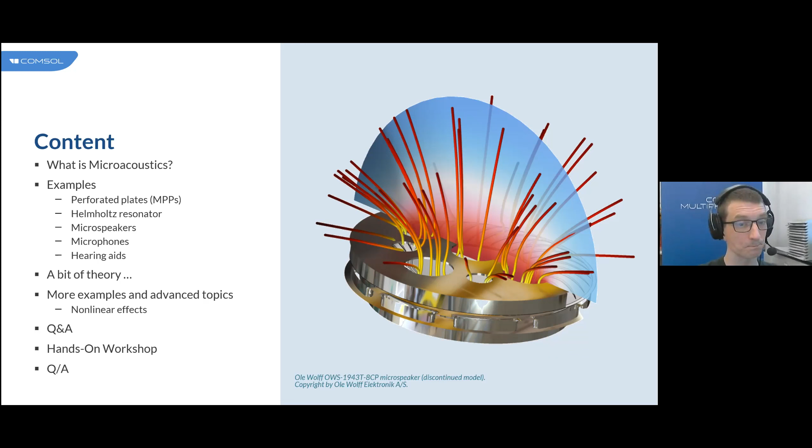So I will have a short introduction: what is microacoustics? Then I'll be focusing on a few examples. I will actually start with a Helmholtz resonator model with a lossy neck, so to speak. I'll talk a bit about perforated plates. Then we'll see some more advanced applications like microspeakers, microphones, hearing aids. In all these examples, we have small length scales in this millimeter and sub-millimeter range, and that's why we sometimes call it microacoustics.

Then we will have a bit of theory today. I think it's good to just get an idea of where the governing equations are coming from. And then I have more examples prepared, advanced topics, and I'll be mentioning nonlinear effects also.

So actually the image to the right here is a model of an Ole Wolff microspeaker. And the image has some nice colors here, but this is an actual tutorial model we have of an actual microspeaker. And now that I mentioned nonlinear effects, I just want to show you a cool animation of something that is also a thermoviscous phenomenon.

It's actually the generation of, in this case, thermal waves or thermal vortices, where a high intensity acoustic wave interacts with a small slit. So this is a much more advanced topic, nonlinear transient simulations, but the colors you see here are actually temperature fluctuations of the acoustic field. Just a nice animation with some nice colors also.

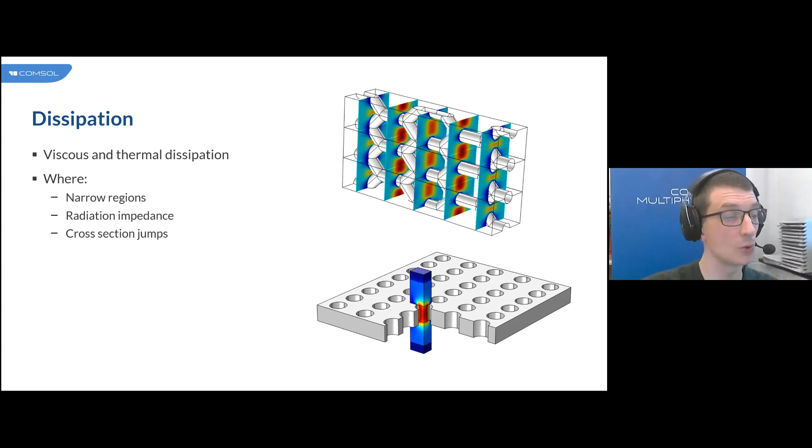I think, since there are so many COMSOL users present today, let me open the model that I set up in COMSOL. I will not go through the details of the setup - Tua will be doing that, not on this particular model, but after this presentation. So this is a very simple setup, a very simple geometry. It's a 2D axisymmetric model.

And I've parameterized my geometry here - the radius, the length of the neck, the radius of the volume here, the height of the volume. And then I've included the losses in this case - this is something I'll get back to. I've included the losses in the neck here using one of our many formulations, called the narrow region acoustics.

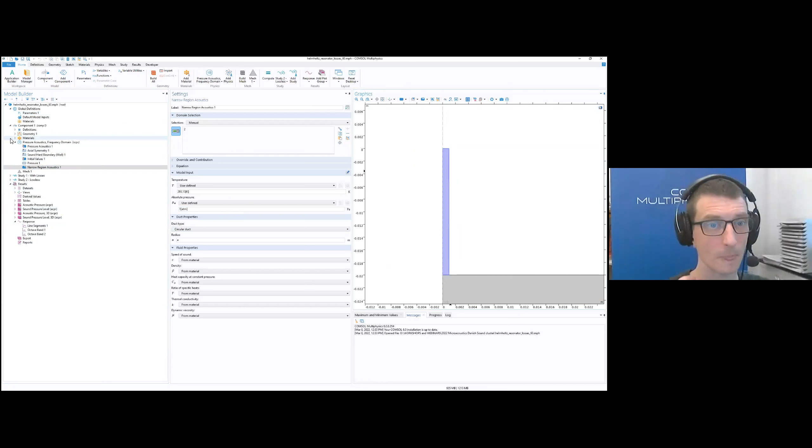And this is, so the losses are included in the neck only in this model. And then I've solved the model with and without the losses. You can change the neck size here, for example. You can, of course, post-process everything you like, and I've made a plot here of the response. So I'm just probing some pressure level somewhere in the resonance volume.

Any questions so far on this? No? No, not good. Not yet. Not yet. Please ask questions.

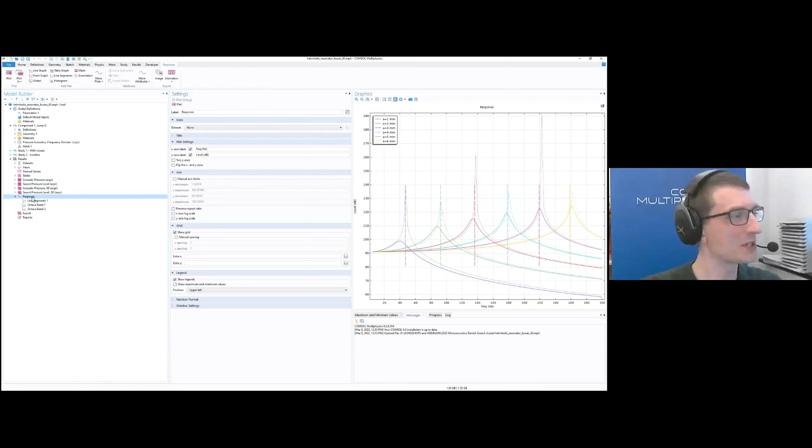So yeah, again, this was a very simple, small, classical textbook example, but I think it shows what you actually see in many systems. So one classical Helmholtz resonator system is the ear, where when you have an earbud or a hearing aid coupled to the ear, you actually have a Helmholtz resonator in the ear. And this is typically what you see - the resonance. If you change, for example, some tube diameters connecting to the ear, you typically see that you get a lower resonance frequency, and you lower the amplitude of the resonance. So it has some actual applications.

I also know that, for this, if you have a circular duct and a nice volume, you can add corrections to the analytical expression that will take the losses into account to some extent. But that's only true if you have a circular duct and a very simple geometry. As soon as you start building something real, you can do some approximations, but if you want to capture the losses correctly, then you need to use simulation.

Good. My next example here is perforated plates. So I want to mention this example here - we don't have it in the library, but if you want it, we'll be happy to send it along.

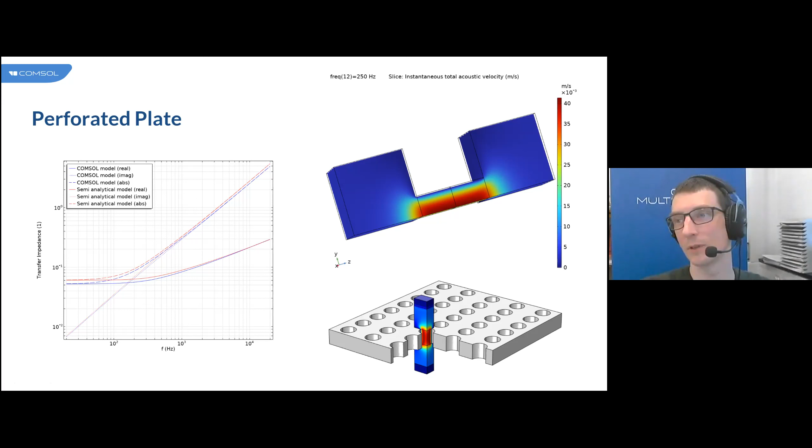Yes, these things are all geometry dependent, and there's a question about whether these losses can be level dependent. Yes. Will a frequency study actually capture that? No. When you model in the frequency domain, you are always modeling linear phenomena.

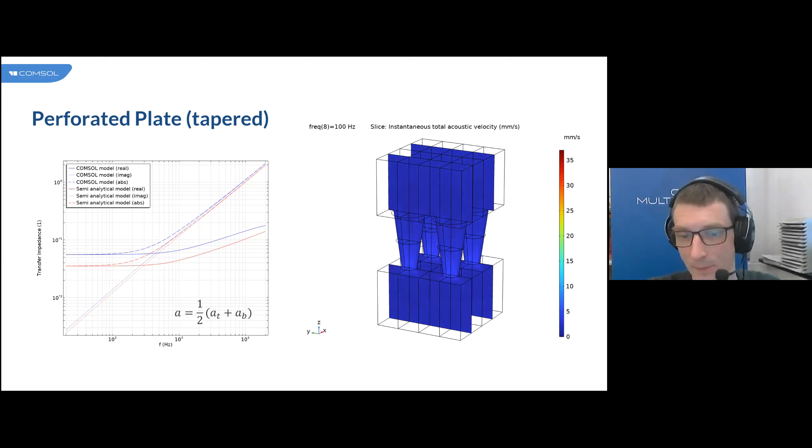Where was I? Yes. I can maybe, since I built the model, let me just open it here.

So this is the model. What I'm actually modeling is only a quarter. This model is nice because it's parameterized, so it's easy to change some of the parameters. I have the top radius and the bottom radius and the thickness of the plate, the distance in the X and Y direction. By changing these parameters, I can easily change how my hole is looking. In this model, the transfer impedance is computed by looking at the average velocity in the middle of the hole.

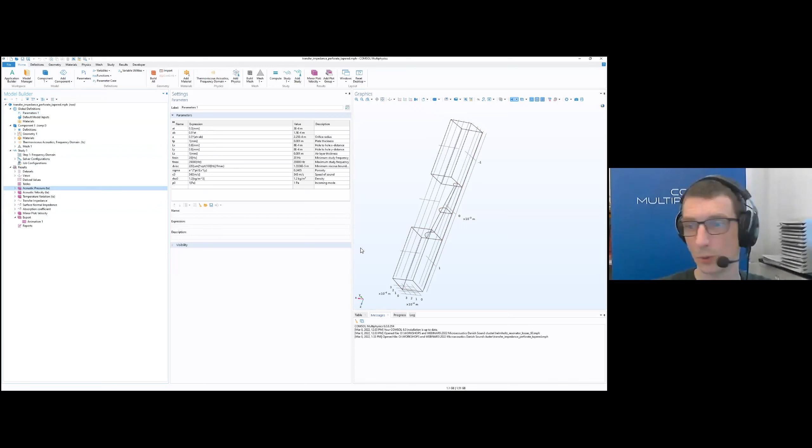I don't know if the results will change much, but it could. So then you can, of course, look again, post-process, and look at the velocity.

What is nice also, if you've worked with perforated plate models, you remember there's this concept of end correction. The color here represents the movement of the air. The end correction is that, since the air is moving in the duct or the perforation, some air is actually also moving outside of the perforation. The effective length of this piece of air moving out here is actually the end correction.

We've looked at this for some conference papers before, and you should actually use different end corrections for the resistive and the reactive part of your transfer impedance, which is typically not used in the analytical models, but it's something you can play with when you have these detailed models.

You can also see the temperature fluctuation in the model here, and then the transfer impedance. We've also computed stuff like surface normal impedance and also the absorption coefficient.

We've used some post-processing tricks with some mirror data sets to make it look like we modeled four holes actually. Post-processing, it's a whole story.

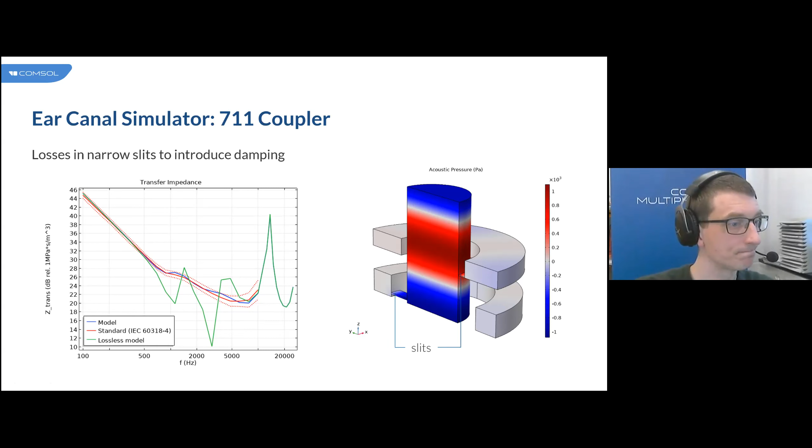Yeah, losses are important. Good. Time is flying. I have plenty of time. Good.

So now let's move more from theoretical or academic examples to some examples of actual applications, again to motivate the use of thermoviscous acoustics.

So you have a small closed volume where in itself you have losses, and you also have this change in compressibility at the low frequencies because of this isothermal adiabatic behavior. And then you also see in the port itself you have losses going on.

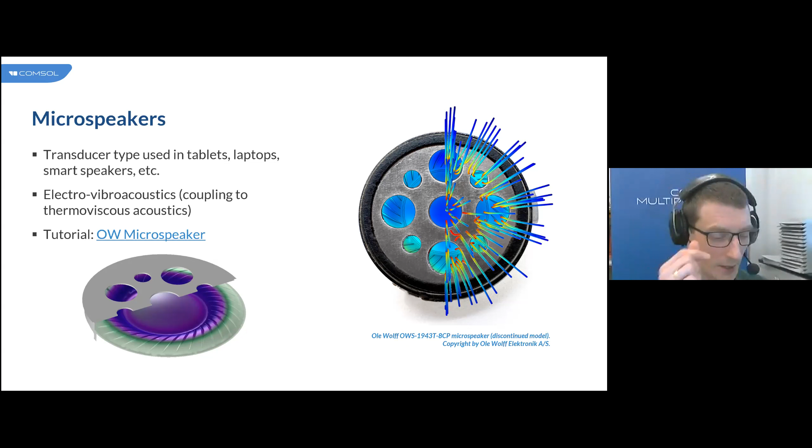This is the image we saw in the beginning, the image in the background. It's a full multiphysics model of a small microtransducer, an Ole Wolff microspeaker. It's the actual geometry we received from Ole Wolff, and we have measurements and material data from them. It's one of our tutorial models. This speaker is, I think, 19 millimeters in diameter, if I'm not mistaken. It's a full electrovibroacoustic model where you have moving parts, thermoviscous acoustics in the back volume, and some thin slits. Maybe it's a good idea to open the model so you can see it in COMSOL. We have this application library, acoustics module, electroacoustic transducers, and this is the Ole Wolff microspeaker.

Maybe nothing to do with acoustics at all, but yeah.

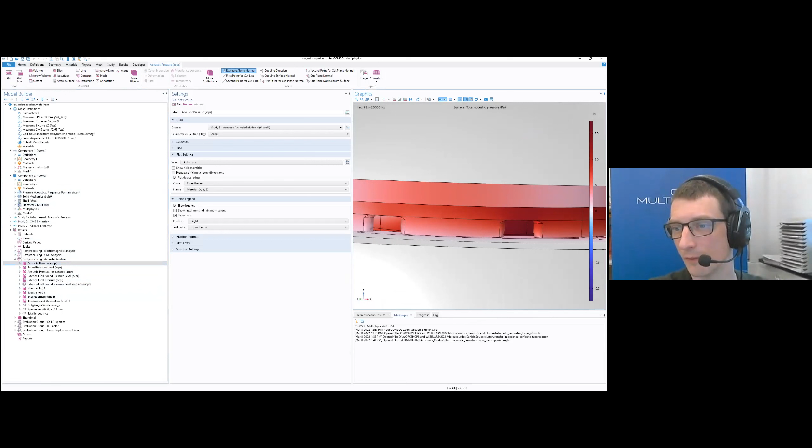The picture behind me is completely created in COMSOL, so you can do nice post-processing, especially in this case. It's a complex geometry where using any analytical model would be very challenging. You have these slits that connect the back volume of the speaker to the outside, the mechanical movement of the membrane, the speaker membrane, and it's a fully coupled model. So quite an advanced model, a very nice model, and it shows that you can compare measurements with simulations and get very nice agreement between them. Again, in this model we show the difference between including and not including thermoviscous losses.

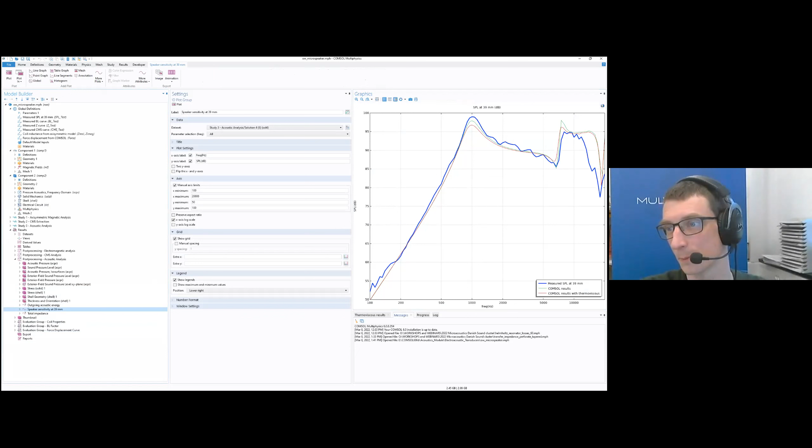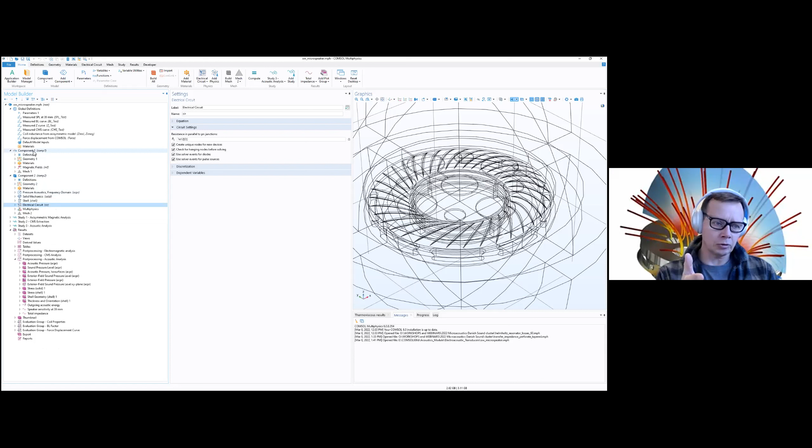To say a few words about this model: we're doing the sub-modeling tool we talked about, analyzing the electromagnetic system separately, and extracting some lumped models that we use in a small electrical circuit to represent the electromagnetic part of the problem, just using an electrical circuit. Then for the 3D model, we're only modeling the structural and acoustics parts with full finite element simulations. The nice part of this one is that it shows you can do part of the model in 2D and part in 3D, so you always use your computational power as efficiently as possible.

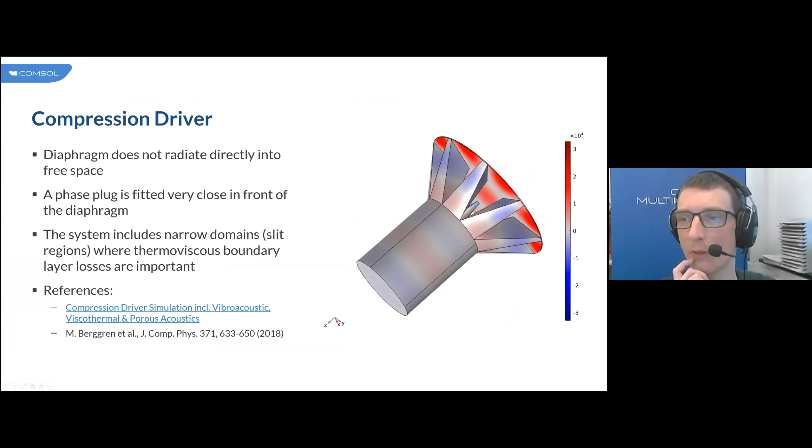Final example: now we're moving to something a bit bigger, a compression driver. I just have a few images to show you here, but here you have a very thin space. It's a type of speaker where the diaphragm doesn't radiate directly into free space, but uses a phase plug fitted very closely to the diaphragm to connect it to a waveguide that sends the sound out. The diaphragm is up here, you have a thin region, the phase plug, and then a waveguide in this case. So this system includes narrow regions between the diaphragm and the back plate, or front plate, but you also have thermoviscous losses in the phase plug here.

If you want to model compression drivers correctly, you need to include thermoviscous losses.

We have a model that you can't find on our homepage, but we're happy to send it. In it, the driver membrane of the compression driver is modeled with a composite material. In each of these squares, you have a different orientation of the fibers in the speaker diaphragm, which generates this interesting SPL distribution in the model.

You get some strange deformations in the membrane because of these composite properties. But this is a different size, except for the thin membrane.

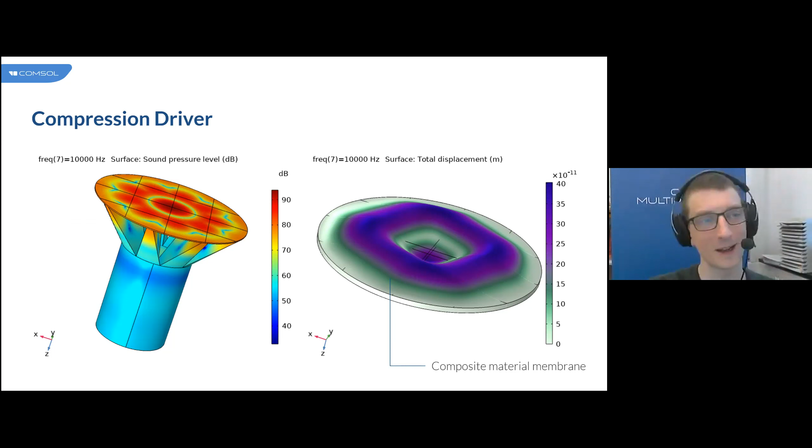Okay, great. So that was a long introduction, but I wanted to give you some ideas of applications where thermoviscous losses are important and where you should include them to model your systems correctly. Now I think I'll actually do a bit of theory, which I don't often do in my webinars because we don't usually have that much time, but today we have a lot of time.

I want to sketch out where the governing equations for thermoviscous acoustics come from. What's important is not to follow everything in detail—I won't explain every single term in the equations I'll be showing. If you want to read more, I suggest following the link we'll send out with the slides later.

We have a COMSOL Cyclopedia page with an introduction to acoustics, where the governing equations are derived in great detail and explained. If you find it interesting, I highly recommend you check out our Cyclopedia page.

What I want to show you in the next few slides is that the governing equations for thermoviscous acoustics are simply a stage before classical acoustics, before the classical Helmholtz equation—one less simplification of the equations. So physically, they represent one approximation less than when deriving the governing equation for classical acoustics.

Don't worry—when you're modeling with COMSOL and running your simulations, all these equations are handled for you by COMSOL. You don't need to type them in or anything like that. But on the other hand, if you're a researcher and want to go into them, you can always change and manipulate the equations, right? Yes.

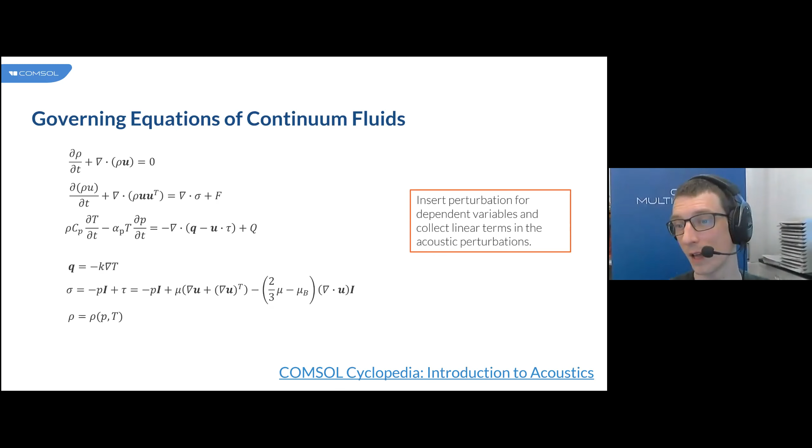And what you then do to compute acoustic governing equations is you take these equations and then you insert a small perturbation. So when a pressure wave is propagating, it's a small pressure fluctuation around the background pressure of 1 atmosphere. In the same way, the temperature fluctuation is a small fluctuation around the background temperature of 20 degrees, etc. So you insert a perturbation of the dependent variables in the following manner.

You take these expressions and then you plug them into the governing equations that you solved before, and then you only retain all the linear terms to get linear acoustics. So we are plugging in the stuff to the right here.

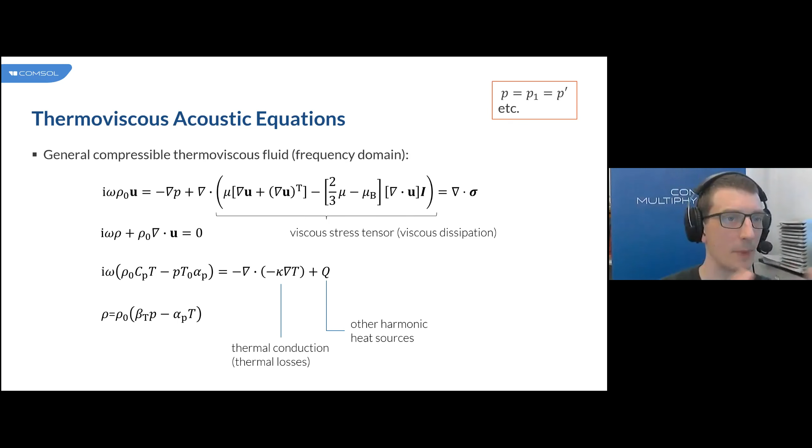So these equations describe, when you solve them, they will capture all these phenomena that I've shown you, like the acoustic boundary layer, the thermal boundary layer, the transition from isothermal to adiabatic behavior. All these things are captured with these equations.

I want to show you how you come from these equations to the Helmholtz equation. You remove all the losses explicitly, setting viscosity and thermal conductivity equal to 0. Then you get the two equations to the left. You take the divergence of one equation and insert it into the other, and what you get is the Helmholtz equation, the classical equation we typically learn about in acoustics classes.

So the equations don't come out of thin air. It's actually the same equations we solve, but just at different levels of approximation.

If you have the Helmholtz equation and want to introduce losses into it, you can define a complex valued speed of sound and density. This is something we use a lot in what we call equivalent fluid models to mimic all kinds of losses in pressure acoustics.

You can also see that if you've solved for the pressure with Helmholtz equation, you can actually recover all the fields we had before. The velocity has to do with the gradient of the pressure. The temperature is related directly to the pressure with some material properties. And the density fluctuations are related directly to the pressure fluctuations through the speed of sound squared. This is the linear adiabatic equation of state.

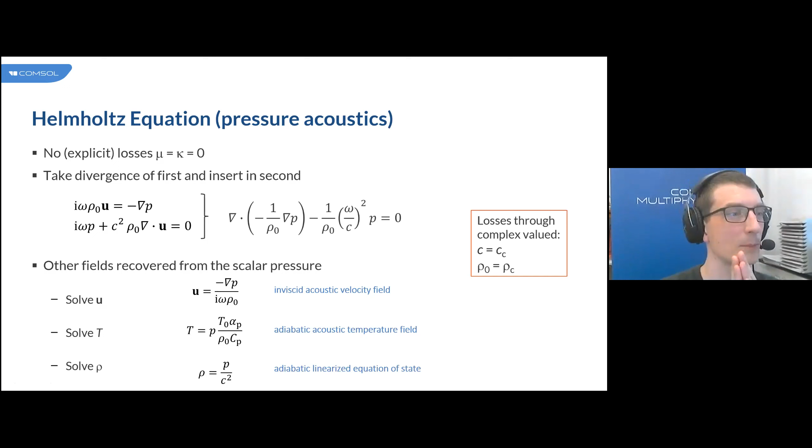So if you have geometry details that are comparable to this, maybe a slit like the 711 coupler had, which was 70 micrometers, then the boundary layer is everything. You cannot really talk about what is boundary layer and what is not, everything is the boundary layer. But if you have a larger model, maybe a pipe that is 3 millimeters in diameter, then definitely - and I will show this - you can model what happens in the boundary layer just with the boundary condition. So it's a good point.

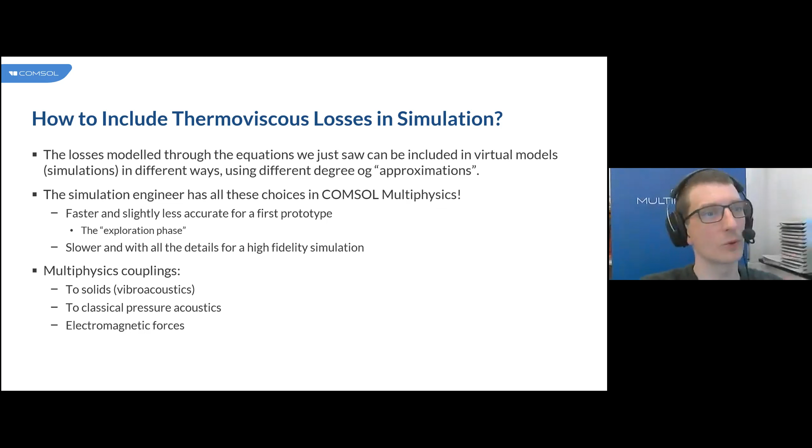As we've seen in some examples, these things can be coupled. So you want to do multiphysics simulations typically when you have transducers, so you can couple to vibrating solids, vibroacoustics. You can couple to classical pressure acoustics, like in a mobile device - outside of the small regions you want to use just pressure acoustics. And you can also include electromagnetic forces.

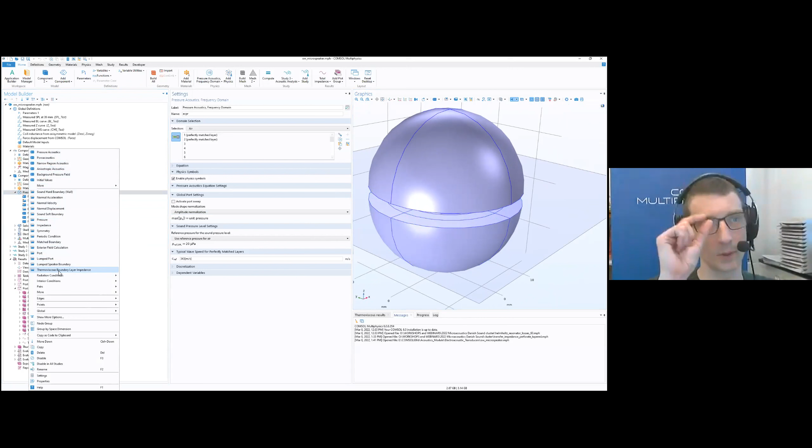So I'm just jumping back here at my microspeaker model, I just want to show you. When you right click, you will see this too - we have the list here, and it's called Narrow Region Acoustics. It's a domain feature, so you click on the waveguide itself, and then we have the boundary condition down here, thermoviscous boundary layer impedance, which is the other option for when the boundary layer is thin relative to the geometry.

So again, the choice here is up to the simulation engineer. We have some guidelines for when you can use the different methods, but again, when you test new concepts, when you are setting up the model of a system for the first time...

try to use some of these more simplified methods, like the narrow region acoustics feature or the thermoviscous boundary layer impedance functionality. Try to use those, maybe even if you are on the border of when they are valid, because you will be able to solve your model much faster, and you will be able to see if your design is moving in the correct direction.

So let's say you will maybe capture 90% of the losses instead of having no losses at all. It's much better than not including these losses.

And then when you are closer to your final design, you can start to use the full thermoviscous acoustic formulation. Of course, there are situations, if you have a closed volume in a small MEMS speaker or in a condenser microphone, these simplified approaches do not apply. Then you will need the full formulation.

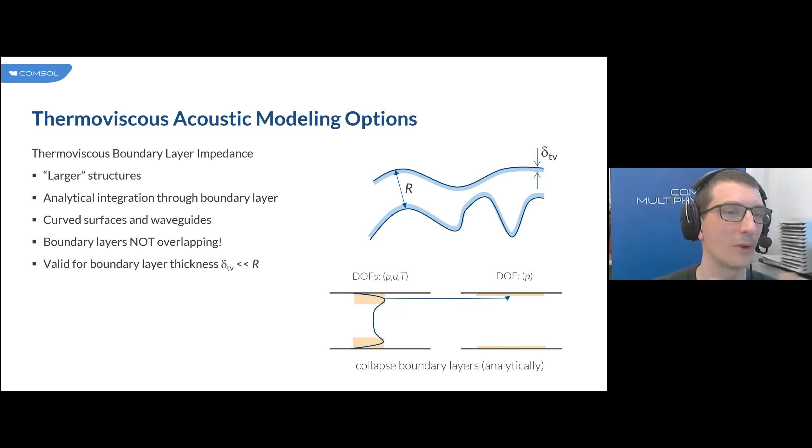But it plays into this overall theme that we have talked about, using the power where you need it and using the right tool to get the job done, right?

So what I've prepared now is I want to show you a bunch of more examples. I will not spend too much time on them. They are examples that you can download from our homepage, and they're all, I think most of them are examples you can download. They are on our homepage or in the software itself. And then I just want to spend a bit more time on some of the nonlinear effects at the end. And I think we should have some time for some questions. But yeah, let's see at some of my more examples here.

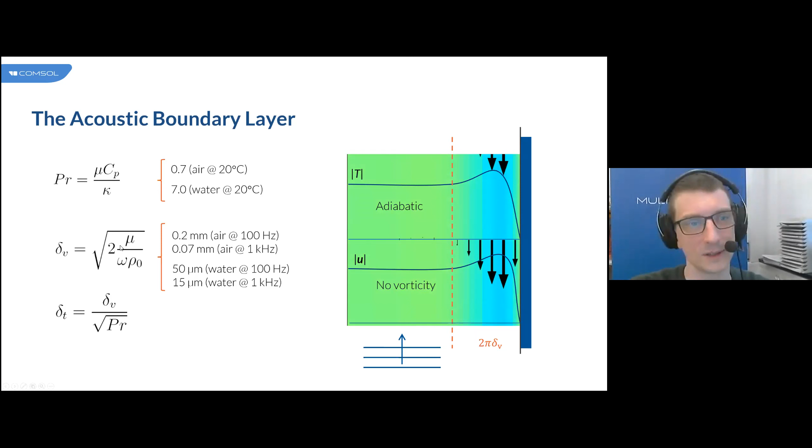It's a trick we often use in the tutorial models.

I'll get back to this perforated plate model and look into computing a volume average, and then also try adding boundary layer impedance at high frequencies. I expect there should be a match between the models. Then you can actually run the boundary layer impedance model at lower frequencies, where in theory it's not valid anymore, and see when it starts to deviate a lot from the full model. That gives you a feeling for when you can use one method versus the other.

So it's a good suggestion, I'll have a look at that also. Thanks, that's why it's so nice to get good questions. You also get some nice feedback and good ideas.

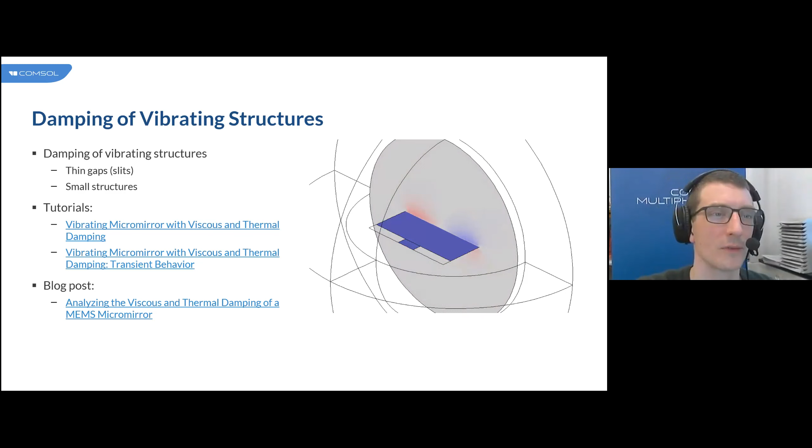Most of the damping actually comes from the little mirror being surrounded by viscous fluid. Here are some links to tutorial models and also a blog post if you want to look more into that.

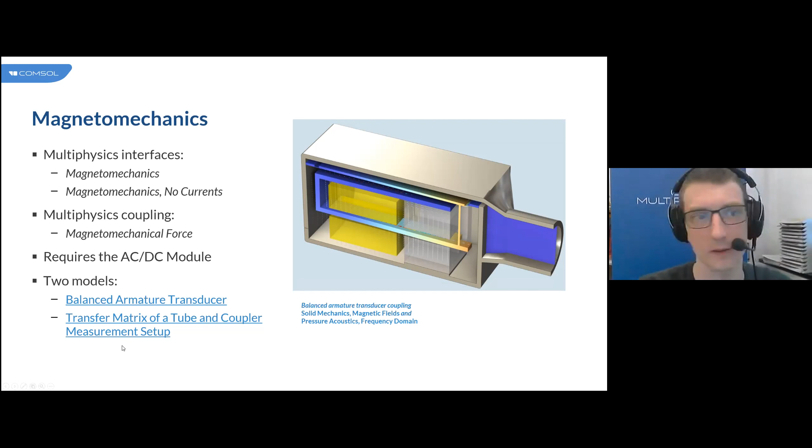And again, some more balanced armature transducer models here. They are coupled to a test setup with a piece of ear mold tubing, and there's a coupler volume. And this model actually looks at the vibrations and the acoustics of the transducer.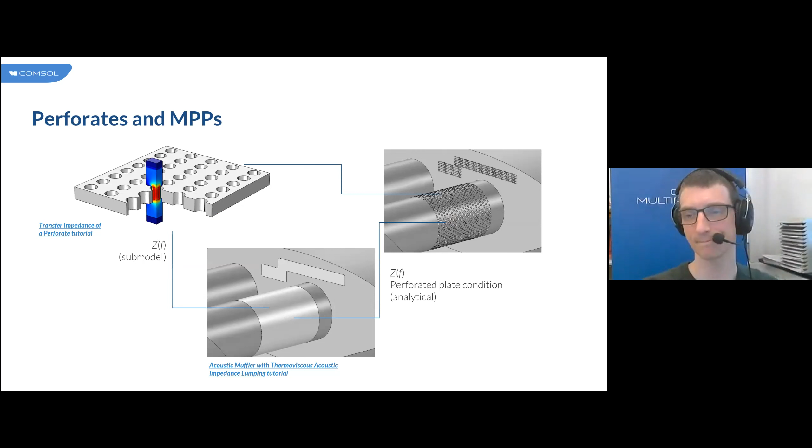Microphones, we've talked about those, but I just want to mention something nice: if you have a microphone and you are using thermoviscous acoustics, then you can actually compute the losses in the system. You can compute the equivalent acoustic resistivity in the model, and from that, using this Johnson-Nyquist model, you can actually compute the thermal noise of your microphone. In this case, you should think of thermal noise not as having to do with temperature so much, but as having to do with heating due to viscous and thermal dissipation.

Good. So in the beginning I showed you, so I think this is what I wanted to say about linear, or multiphysics models and linear thermoviscous acoustics. And then at the end here, I have a few slides on some nonlinear effects, also I know they're much more advanced applications, but things you can actually model and gain some insight into. Are there any questions, Ture, before I proceed?

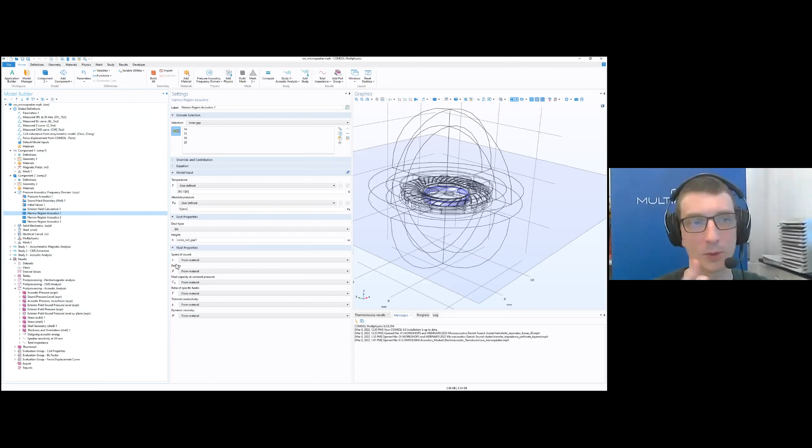And those depend, of course, on the background temperature. They depend on the background pressure—is it 20 degrees in your room or 25? But they also depend on the humidity in your environment. And actually, if you really want to go into details about the composition of the air—is there more or less CO2 in the air? Are you working with a special environment, like maybe a closed cavity with some special gas in it?

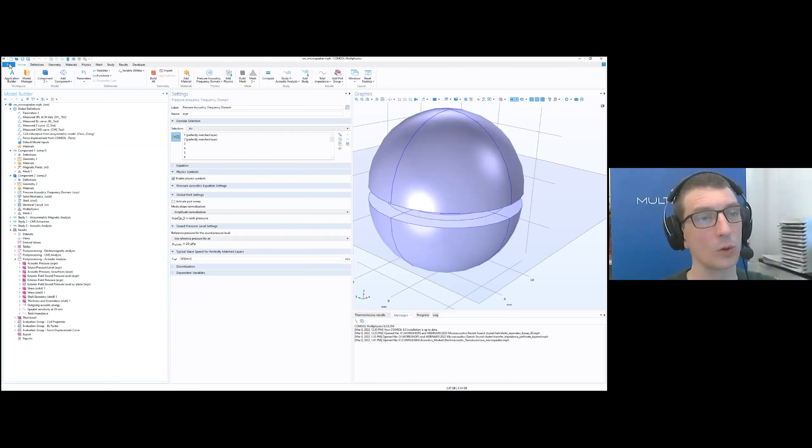And we can actually—I just want to mention this—in COMSOL we have something called the Liquid and Gas Properties Module, that adds functionality to COMSOL where you can compute the material properties from first principles, including temperature, pressure, relative humidity, and also composition of the air. So if you know these things, you can actually get very accurate and very good values for the material properties.

And if it's something you want to look at, I recommend you take a look at our model of a pressure reciprocity calibration coupler that is used to calibrate microphones. And this model actually shows how you use this liquid and gas properties, or thermodynamics functionality, to set up moist air in your model.

So it's actually quite interesting because some years ago, I was fighting with some standards here and there, and it was very difficult to actually get IP rights to implement or add detailed properties of air because of some kind of legal issues. But then we had this thermodynamics functionality that was being developed, and I heard about it from one of my colleagues in Stockholm.

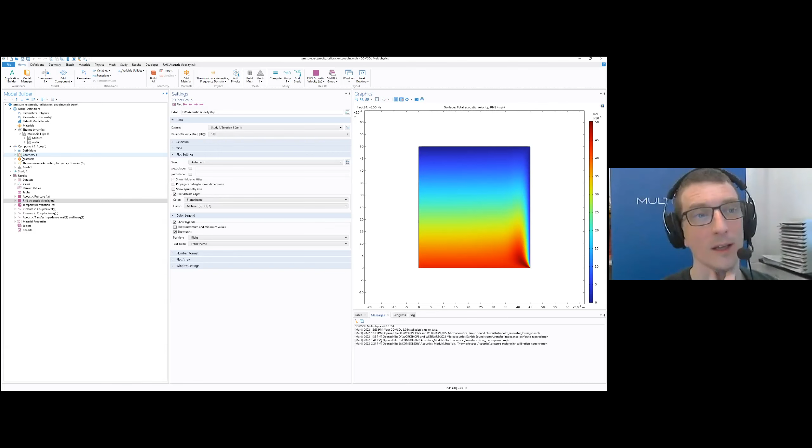And he said, well, we can model moist air. And then working with them, they actually made functionality. So it's super easy, you can just write and set up a predefined system where you can select dry air, moist air, or water steam mixtures.

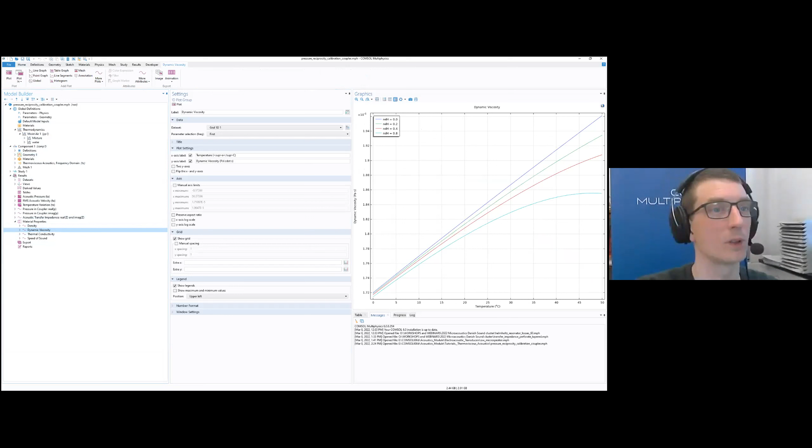We have built in some of these thermodynamic systems for some of the most common uses. So you can set up moist air really quickly, and then you can compute the dynamic viscosity as a function of temperature and relative humidity with great detail and precision. So it's not something you do in your average first model — it's when you're really fighting details.

Then there's another question about boundary conditions or boundary simplifications for this 3D compression driver with structural couplings. I think we need a little more information from the one who asked, so if you can elaborate a little, then we'll come back to that question.

Yeah, definitely, so I will go quickly over this. I want to talk a bit about some new functionality we added a year ago. Now we are moving to the time domain because we want to capture nonlinear effects. Those are effects you typically see in miniature loudspeaker ports, in perforated plates operated at high sound pressure levels, in grills, meshes. So you can compute the added, or the nonlinear, resistive losses, and you can also compute distortion due to when a nonlinear effect is going on.

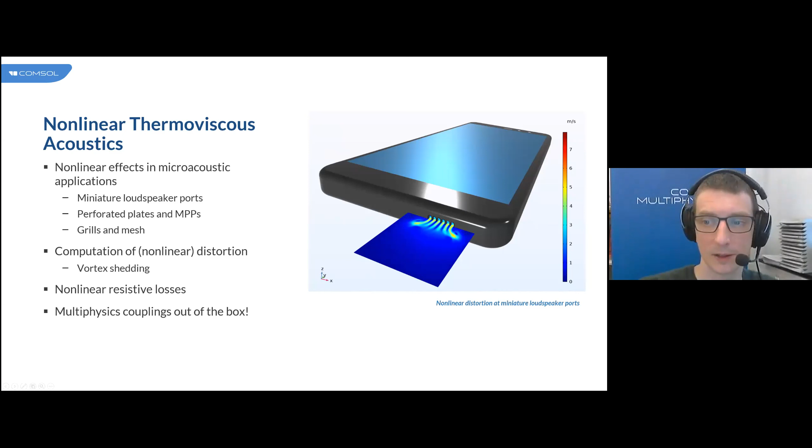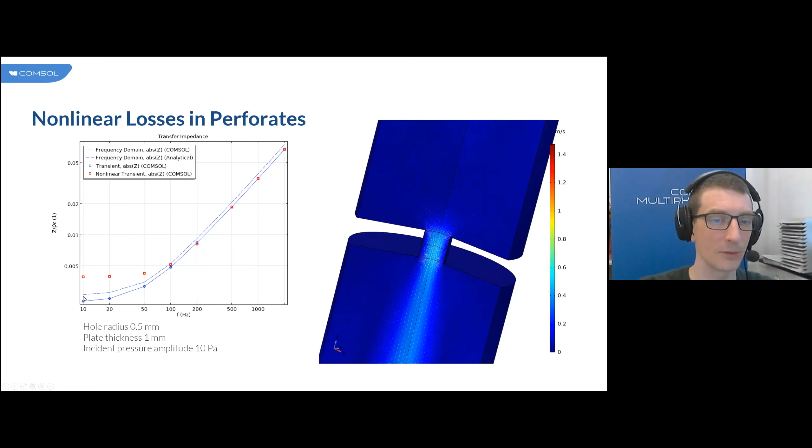So this was the question, if you can compute the level dependent transmission loss. Depending on the amplitude of the incident wave on the perforate, these values will lie in different locations. As you increase the incident level, the transmission loss will actually increase, but the transfer impedance — the absolute value of the transfer impedance — you can see is also frequency dependent. So there's an interplay now between frequency, level, and geometry.

So what you get is something called nonlinear thin film damping. Here the nonlinearity is not coming from large amplitudes, but from a change in the geometry. You can see this: the system is being excited by a single frequency, but when you look at the response of the system, you get higher harmonics generated. And this is also only in time domain that you can capture these effects, right? Yes, yes.

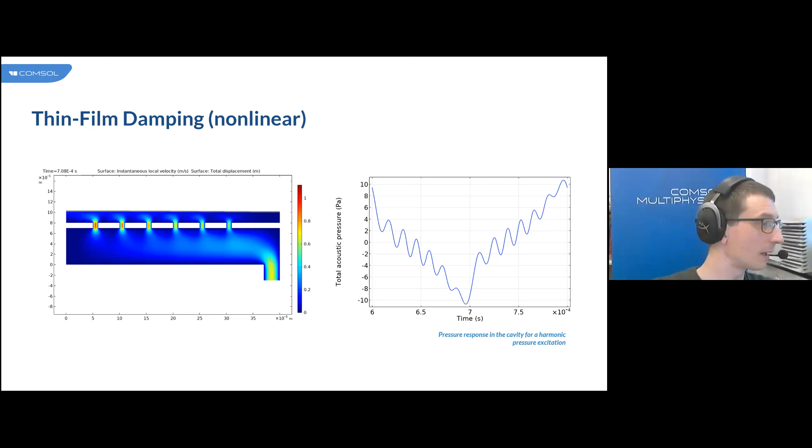Good, I think I'm at my second to last slide.

This is actually in the order of several degrees Celsius fluctuations. The air is getting hotter and colder by several degrees as this acoustic wave interacts with the small slit.

It's mesmerizing, like a lava lamp, right? Yeah. You can almost fall asleep just staring at it.

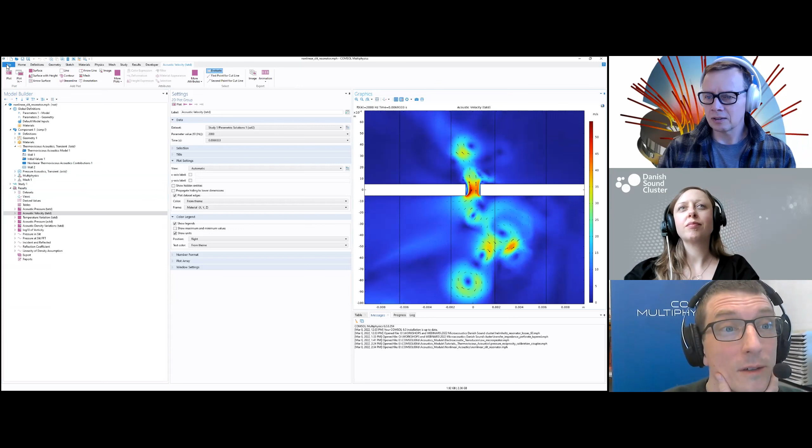We have another question: can you go directly from viscous losses to BEM, or do you need some kind of FEM in between, pressure acoustics in between? That's a good question. I think we can couple directly, but I can check.

Yeah, I think we can, but I'm pretty... here we got them. This is something we've not talked about, the numerical methods we use, but we have several of those. So, Thermoviscous acoustics... oh yes, they are coupled together now. So yes, it's already a predefined coupling, so you don't have to worry too much about it.

So one thing you need to be aware of - I don't know if this is for the person that asked, but it's always good, if you have a wall in common between the pressure acoustics (either boundary elements or finite elements) and the thermoviscous acoustics... If it's an outer wall, say you have a waveguide that comes out to the outside world, I recommend you add an extra wall feature on the outside wall and select slip, adiabatic there. Because then the physics that are coupled together will be complying. Otherwise you have a boundary layer that suddenly ends where there's no boundary layer, and that can introduce some small numerical errors. Typically not very important, but it's good practice to have physics that are compatible when you couple them.

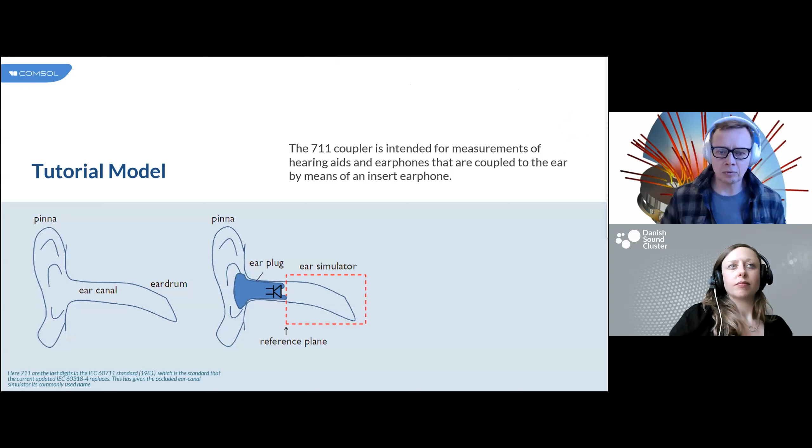The more in-depth acoustic questions we will have to refer to Mads, but I will take questions about the general use of Comsol. So the model we're going to do is the 711 coupler that Mads talked about, which emulates part of the ear and looks something like this. We will actually model this both with and without these viscous losses in these slits to see the difference, and see how you can build up the model one step at a time in order to capture the effects necessary for a correct result.

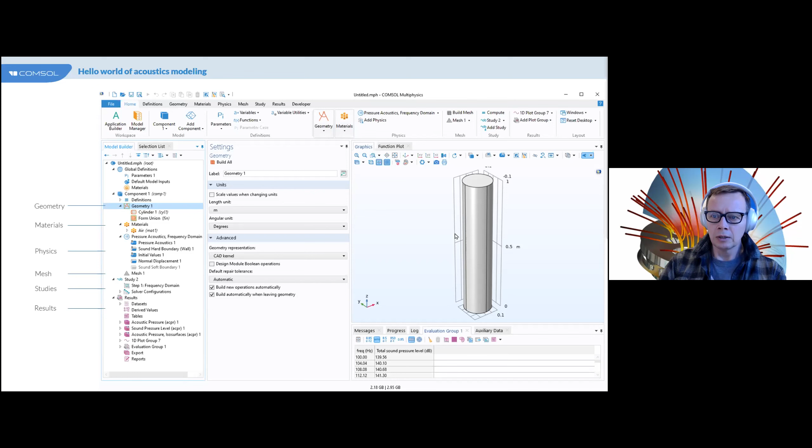So if I start COMSOL, it will look something like this. What you usually do is start a new model using the model wizard, and you can work in 1, 2, or 3 dimensions and axisymmetric models.

Axisymmetric models are quite useful for loudspeakers often, but in this case I'll just start a 3D model. Then you need to select what physics to include, and it can actually be quite cumbersome.

I'll show you where in the documentation you have a short description of all the different physics, so you can choose the right one. For simple pressure acoustics, we start with this pressure acoustics frequency domain, which would be a finite element version of it, but there's also a boundary element version and a transient version.

So I press add, and you can see I have pressure acoustics, and I'm solving for the acoustic pressure, called P, so the dependent variable is pressure. Then I press the study button, and I'll do a frequency domain study, but you can do other kinds of studies also. Press done, and then I'm in the model.

So you can see I have a 3D drawing board, I have the pressure acoustics, and I have a frequency domain study step here.

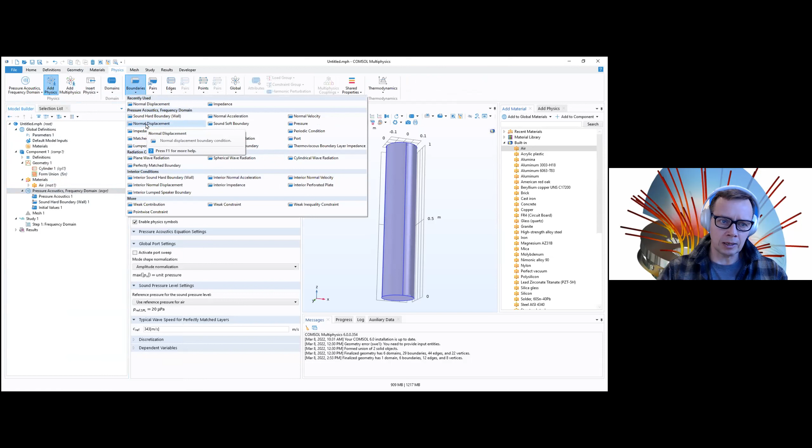So I have a node in the tree, normal displacement, and I click the boundary, and then I put in the parameter G0. And then I'm basically done setting up the physics.

I don't want to mesh the thing yet, because I'm going to use something called physics controlled mesh, which is new in 6.0. For pressure acoustics, you can let the physics control the mesh, but in order to control the mesh correctly, it needs to know the frequency. So I need to specify what frequencies I want to solve for.

So I'm clicking the study step here, and then I can type in the frequencies, or use this nice range builder icon. I can have start, stop, step, or whatever. But often in acoustics you have these ISO preferred frequencies, where I start at F min, which was 100 Hertz, and go on to F max, which was 500 Hertz, and then specify how many frequencies I want in an octave. I can go with a very fine resolution of 1/24. Press replace, and then you can see what frequencies are actually solved for here.

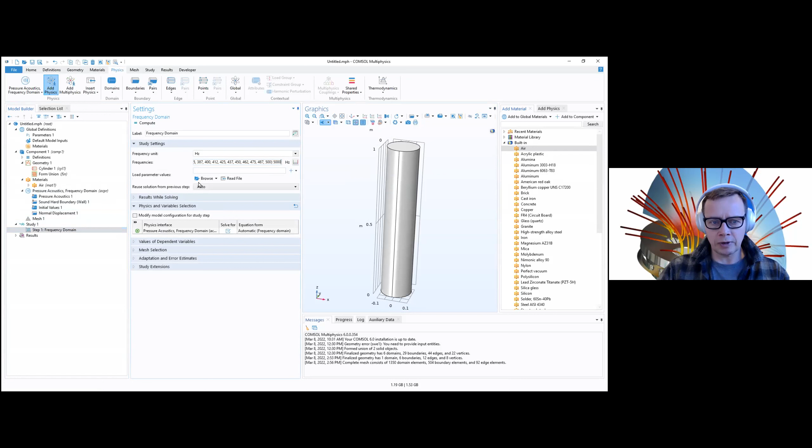Now, when I go to the mesh, it takes the largest frequency and makes sure the mesh can actually capture that, and that can be done with this mesh. Just to show you, if I change the largest frequency all the way to the end here, I've put in 5,000 instead, for instance, then the mesh needs to be much finer in order to capture this frequency or the waves, because you need at least 5 to 6 elements per wavelength, and you can see it immediately makes sure the mesh can capture that. Let me just get rid of that again.

So, we're back to the more coarse mesh now, and we will solve this for all these frequencies and take a look at some output. Whenever you solve a model, you get some default plots. In this case, you get the acoustic pressure for the different frequencies, going to 100 Hertz, and then I can, with the arrow, step through the frequencies and see what happens.

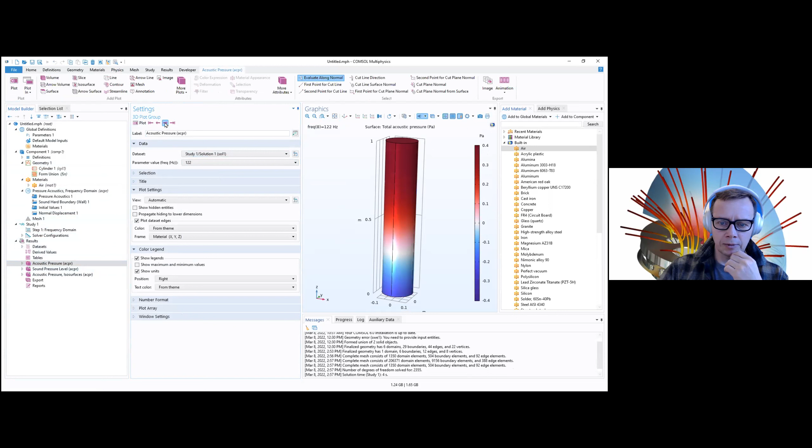There's also a sound pressure level plot and acoustic pressure isosurface plot. What I'd like to plot is the average acoustic pressure on top here for different frequencies. But that's a 1D plot, it's a line plot.

So I create a new plot group, right click this one, create a new plot group. The plot group is just a container, it doesn't do anything by itself. So I right click that, and then under more plots, I can find something called an octave band plot.

Where I can select a point, but that's not what I'm interested in. I'm interested in domain boundary, so I select this boundary here, and that will take the average pressure, total acoustic pressure, and plot it over some octave band.

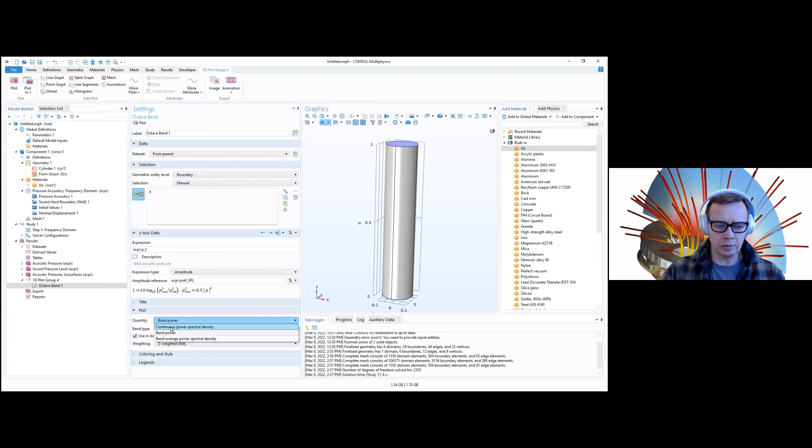But again, I'd like just a continuous line, so continuous power spectral density in this case, and hit plot, and we can see the resonance frequencies showing up here.

I'll give myself a little more space here. This model actually includes, more or less, what all models take to build any kind of model. You set up a geometry, you apply materials - in acoustics it's very often air. You change some boundary conditions and maybe some domain conditions. You measure it, you set up the frequency range, and then you plot it.

A few things are relevant when you solve it. When you solve such a model, what you get in reality is a data set, which holds the solution. So when I do a 1D plot, the plot group tells me what data set to use. If you have more data sets, then you can choose which one to actually post-process in this case.

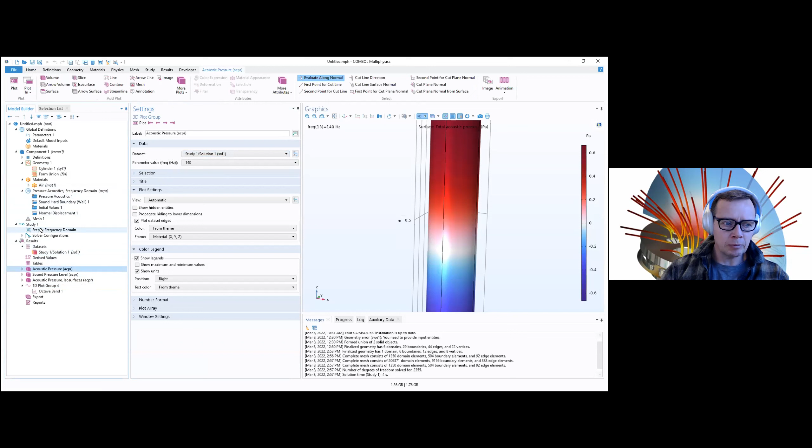And you can see it's the same thing for the 3D plot groups - it works with some kind of data set that you can change if you have more than one. If you want to compare a frequency model with a time-dependent model, then you'll have a study 2 that is a time-dependent model, and you can compare it by selecting the right data set afterwards.

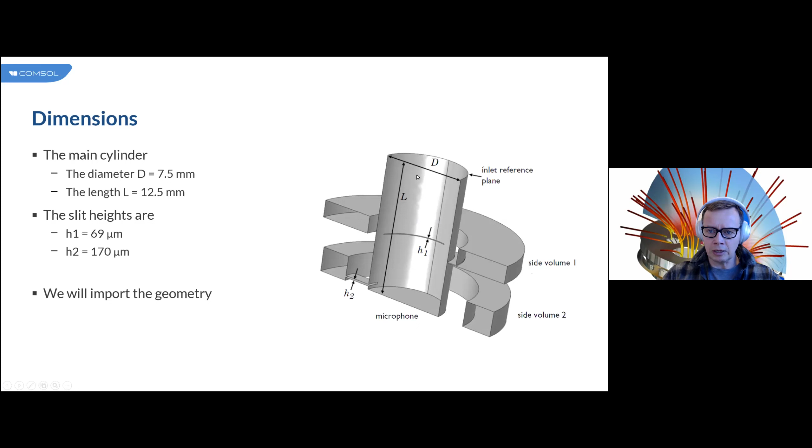So what do we want to do? At the inlet, we have a normal displacement with a specific normal displacement amplitude. And then for the microphone, we will use a lumped version of it that corresponds to the 4192 Brüel & Kjær microphone. We just need to choose the right values for these, and I'll show you in a second how to do that.

But this is what we need in order to actually start the model. And it can be a good idea, when we start this model, to start a new model here - new model, model wizard, 3D model, definitely.

Pressure acoustics, just as before. Again, if anyone wants to follow what I'm doing, let me know, otherwise I'll just go forward and you can ask questions as I'm going through this. So again, we have pressure acoustics - we are solving for the acoustic pressure P. Next, we're working in the frequency domain.

Done. The geometry - it's a relatively small thing, so I'm going to use a millimeter scale, and then I'm going to import the geometry.

This can be any CAD file format that you can come up with, and we can talk more about how to work with your CAD models, because if you have complicated CAD drawings, they might not be really suitable for simulations, but you can do some work on them so they actually work anyway. I'm going to browse to it. So when you're following the step-by-step instructions yourself later on and are asked to import something, I just want to show you where they are.

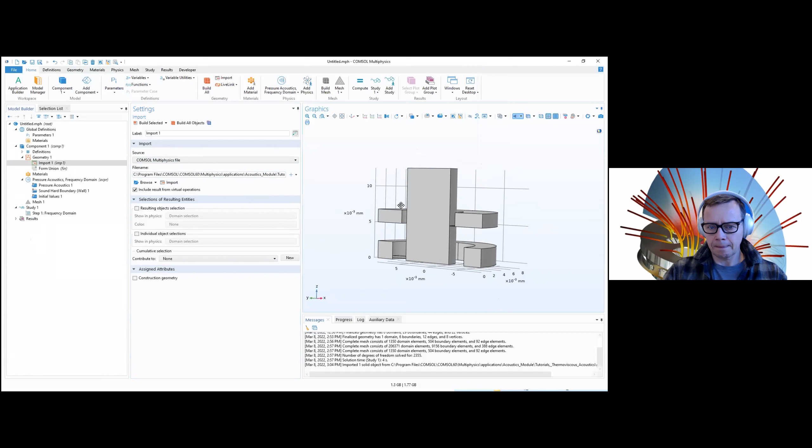So the next thing we want to do with this model is to apply materials. And it's important to understand that what is drawn here is not the coupler, it is the air inside the coupler. So the only material we have is air.

So I right click, add material from library. I go to built-in, and then I apply air.

So now all 6 domains are air, and what 6 domains are that? It's this one, and the slits. They are separate domains for a good reason, because later on we want to apply some special conditions for these slit domains. But for now we will just leave them as they are.

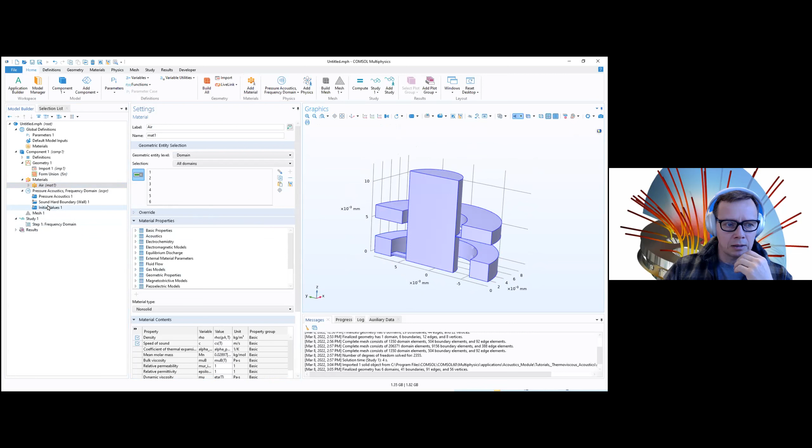You can see by default all walls are sound hard wall. Now this is only half a 711 coupler, so we should have a symmetry condition on these boundaries, but I don't have to set that up because sound hard wall and symmetry is basically the same. But if you want to send it to someone else, you might want to add a symmetry plane and explicitly say that this is symmetric. But for now, I'll just leave it as it is.

But I do have on the top this normal displacement. I just right click on the pressure acoustics, take this normal displacement, and then I click this. You can see it turns red when I hover over it, and then I click, then it's blue, and that means that boundary number 19 now has this normal displacement on it.

If I chose the wrong one, I can hover over it again, then it turns green. When I click, it is unselected. So those are the colors that you use.

I don't exactly know what this should be, so I'm going to parameters, and then I'm going to import some parameters. They are placed in the same folder, and they're called coupler parameters. Open, and you can see I have F max, I have the lumped value for the lumped components, and I'll also have the input source displacement, D0. So I go back to my normal displacement and put in D0 here.

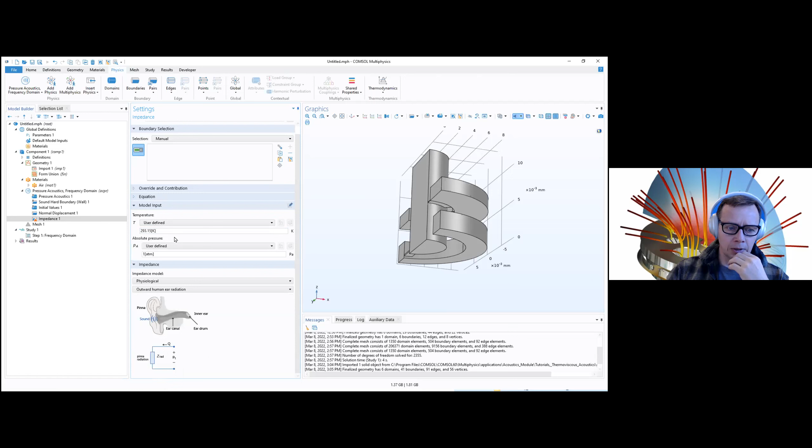But for now, we need an RCL, and you have different things to choose from here. I choose this serial coupling. R mic was one of the parameters that I imported, C mic and L mic.

So now I just need to say, where do I have this microphone? And I have it here at the bottom. So that's boundary number 17, now has this. So at the bottom here, we have an impedance representing the microphone.

On the top, we have the inlet with an inward displacement. And all other boundaries are now sound hard. You can see this one and this one here are no longer highlighted in blue. So those are no longer sound hard. So that's the default one.

Again, it shows you a very important thing about COMSOL, that you override stuff as you go down in these nodes, which is extremely nice when you work with it. So the last thing we need to set up is the frequency domain, or the frequency where we want to solve this. And we want to do that before we mesh it, because again, it is physics controlled meshing.

So I click this one and I click this one, and I want to solve it from 100 Hertz to... sorry, we definitely want to use the ISO preferred frequencies from 100 Hertz to 25 kilohertz. And maybe in this case, we only want 1/6 octave, otherwise it will take a very long time if we have too many frequencies.

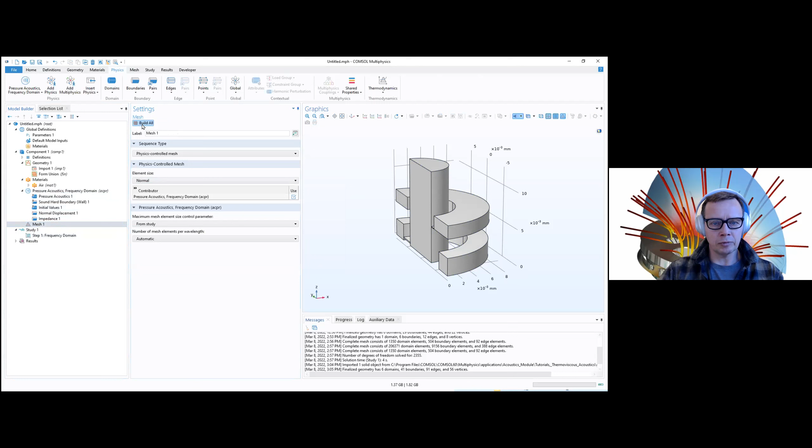Now we can build the mesh, and you can see that it is more the geometry than the frequency that actually controls the mesh size right now. We will come back to meshing in more detail later, because this is probably not a mesh that is going to capture all effects if you have thermoviscous losses in these narrow regions. But let's compute so we can see what is happening.

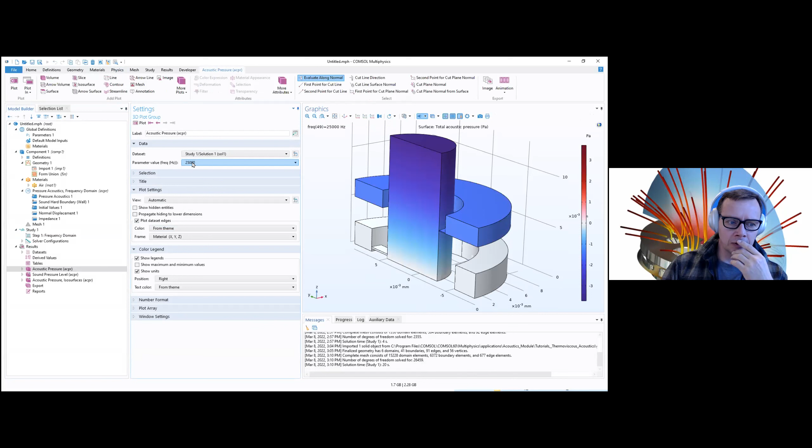So now it's just solving the model. Here you see the results for 25 kilohertz, and you can see the results for the acoustic pressure for the different frequencies. You can see the sound pressure level and so on.

Now you can start to do a little more elaborate post-processing, but I will just do as we did before: look at the average pressure at the microphone, so we get some idea about how this acts. So I right-click, I create a 1D plot group. Again, we only have one study for now, so we only have one data set, so it's easy.

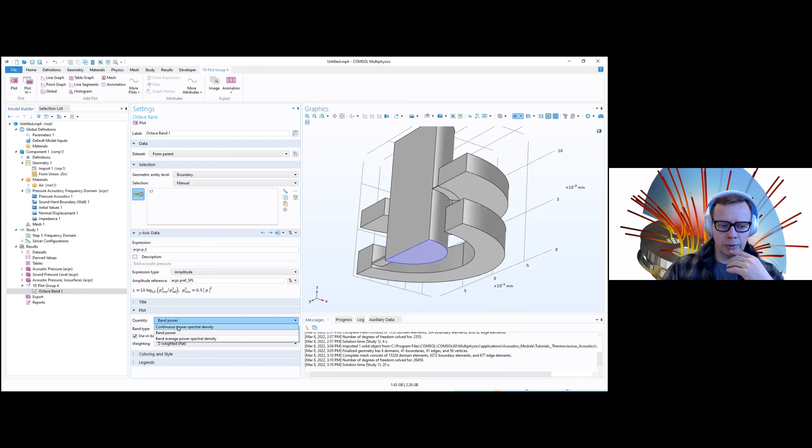I right-click under more plots, I find this octave band thing, and instead of measuring a point, I'm going to measure the average on a boundary, the microphone boundary. And again, just as before, I want to do it in a continuous power spectral density plot. And we have something like this, which is not expected.

I probably have something, yeah. So now I'm going to do something that I shouldn't do, but I think I have messed up the dimensions in my model here. It probably came too small. It became too small because I put it to millimeters, and then I imported something that was in millimeters, and millimeters times millimeters is going to be micrometers, as you can see.

So if I go back to millimeters and then I scale, build all, scale back to meters, build all. So now we have something that is way too small.

So let me just skip this model and open a model where I have done exactly the same, no difference, except that I'm going to plot this. This is the output on this boundary 17 here, where I'm looking at the average pressure.

So in building these models, you can just, I'll just get rid of that one, so you can see how that interacts. I'm going back to the other model, even though it's wrong, just to show you how to add narrow region acoustics to it.

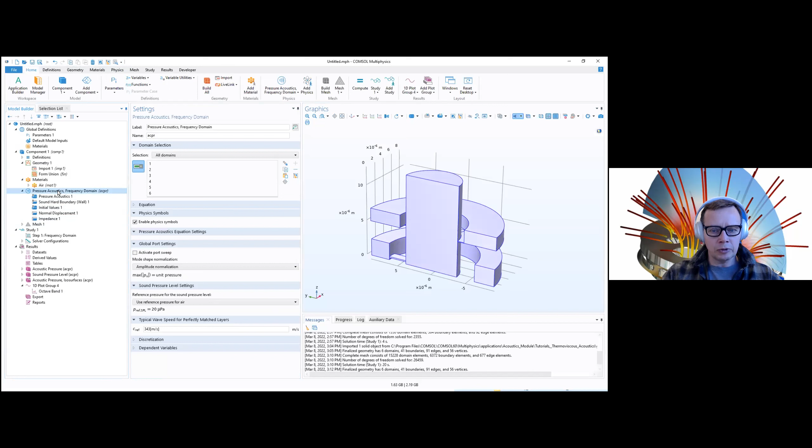You could add thermoviscous acoustics to the model and solve that, but for now we will just show these narrow region acoustics. Again, I can do it here, or I can click the physics tab and have a domain condition that is called narrow region acoustics, and then I'll just select this one. This is an analytical expression, so we need to tell it what kind of slit it is, and this is a rectangular duct.

It looks more like a rectangular duct, and then we can say something about the size of it in order to set up the correct analytical expression. Again, here you can see it's a good idea to type stuff in with units instead of setting up 10⁻⁶ and things. So that was that slit.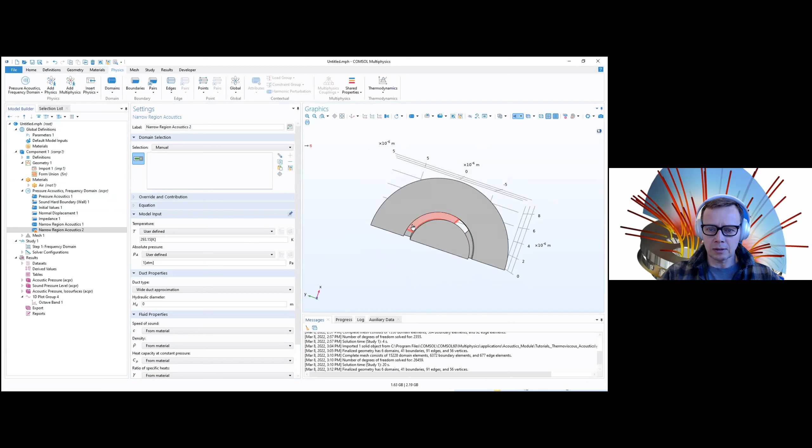The two other slits, the one that is hiding here and the one here, they're more like slits. So I'm going to go to domain conditions, narrow region acoustics. I'm going to select this and this, and these are more like a slit condition. And then I just need to apply the height, which is 69 micrometers.

So now I can mesh it and solve it again, and I will see a different response.

If I want to compare my two different models, one with and one without the narrow region acoustics, I might actually just add another study by right-clicking the top one, add study, add a frequency domain study.

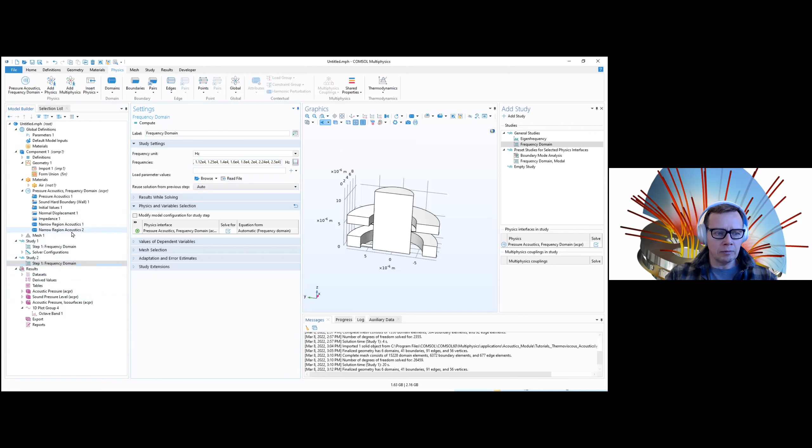And now I can copy paste the frequencies that I'm using in one study, copying them to this study, and then I can solve it again. And now I'll solve it with narrow region acoustics, and that's what I have done in the other model here.

For this model to work, if I don't do anything, both studies will solve the full model, but I can go into a specific study step. Here we include everything in the model. In this one, I click modify configuration, and I've disabled these two conditions. So when I solve study 2, it's always going to be without narrow region acoustics, and when I solve study 1, it's going to be with narrow region acoustics.

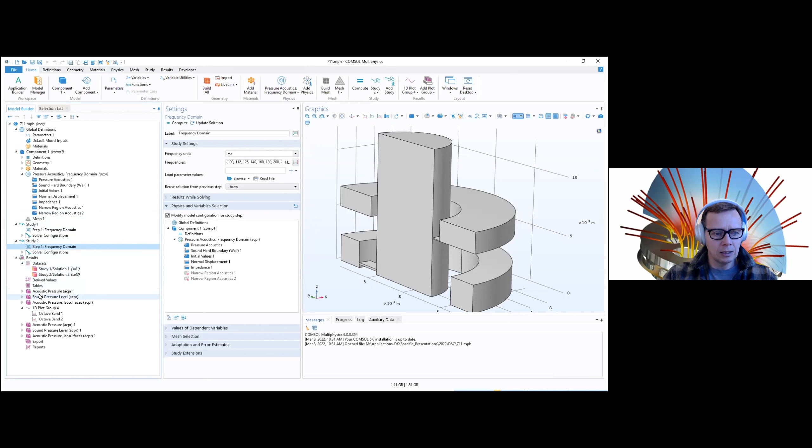So it's easy to compare. The only thing is that I then have two study steps or two data sets. So when I go in for acoustic pressure, right now I'm looking at the one with narrow region acoustics. Now I'm going to look at the one without narrow region acoustics. So I need to be careful about this.

If we take this model one step further, we can do that in the application library. This is what I really want to stress, that when you are on your own, you can go to the acoustics module in the application library, and go down to Tutorials, Thermoviscous Acoustics, click the generic coupler, press open PDF document, and you will have a description first of what we are solving. It's quite elaborate in this case, so I'm moving fast forward.

And then a discussion of the results. But if you are patient and go all the way to this point, you will have an exact description on how to build it. In the new window, click the model wizard. In the model wizard, click the 3D button, and so on and so forth. And you will be handheld in setting up the model.

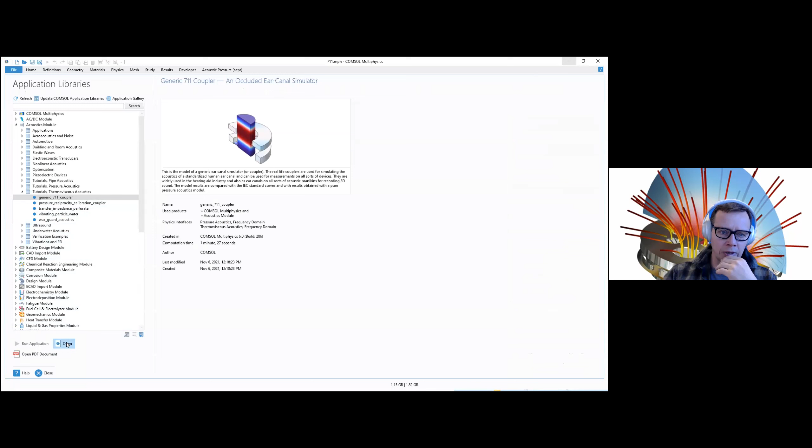And I recommend that you build a few of these models. When you have done it, you start to get the grip of it. Then you can just open the model and see what is going on inside.

This model is comparing a full thermoviscous acoustics model with narrow region acoustics and with only pressure acoustics. So it actually has 3 solvers in it. You can see I have thermoviscous acoustics in only the slits, and then pressure acoustics in the rest. And then in multiphysics, I can couple the two, pressure acoustics and thermoviscous acoustics.

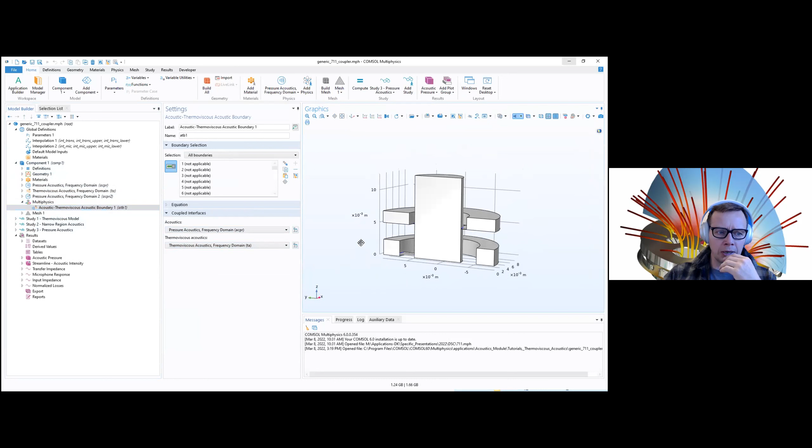But when you have this thermoviscous acoustics, you have to think a little bit about the meshing, because it's something that goes on the boundaries, close to the boundaries in these. So you want to make sure that you have more than one element in this. And you can see in this model, we actually have 3 elements across here.

You can do that if I unfold this: to begin with, I only built a boundary layer mesh, which is a map mesh. Then I sweep that through the thickness here, giving it 3 elements, or how many elements you think is appropriate. Now I have meshed just the slit here. And then I say the rest goes free tetrahedral. Just make sure that you obey 6 elements per wavelength. And then I have my mesh.

So these swept meshes can be quite helpful when you're working with this narrow region stuff.

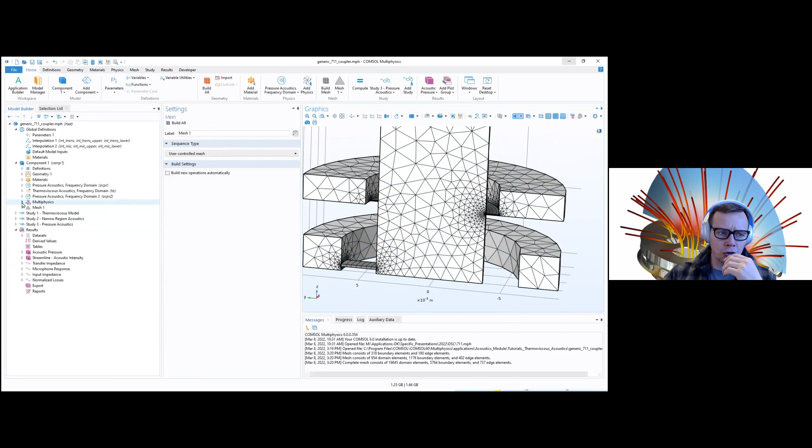And then in this model, since it's a tutorial model, there's a lot of post-processing going on. So you can look at the transfer impedance. The standard is the red line with the band around it. So you have to fall within this in order to obey the standard, and the 711 coupler does so.

If I zoom in, you can see that this purple dotted line is pressure acoustics, and it falls completely out. Then I have the full thermoviscous acoustic model, which is the blue line. And then the narrow region acoustics model, which is the green line, the one that we just set up. The difference here is so small, so the narrow region acoustics is actually capturing the losses in the model pretty well in this case.

And it's somewhat faster than solving for everything. It's 38 seconds in this case, and 1 minute in the other for the full thermoviscous model. But for larger models, there's a bigger difference. So it might be a good idea using narrow region acoustics where possible. But this is a nice tutorial model.

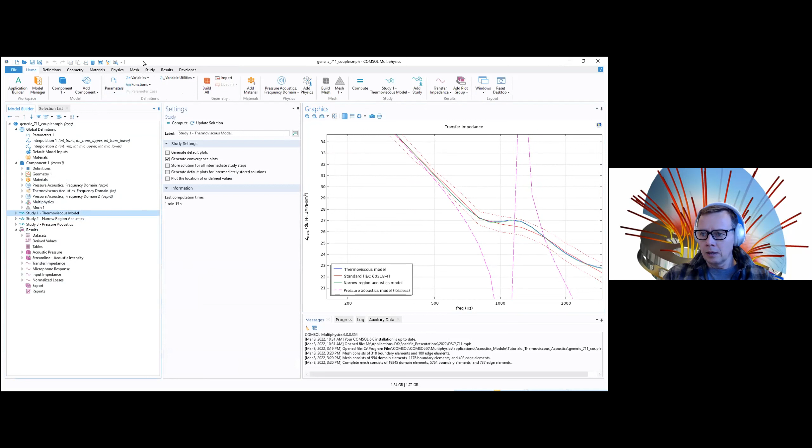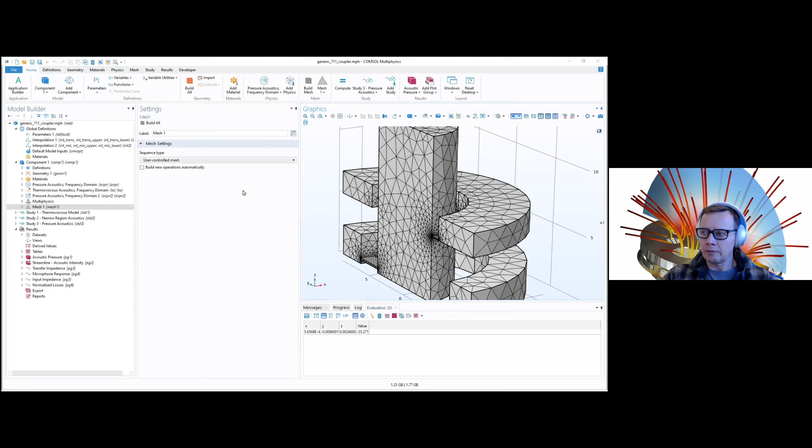When you start to model on your own, if you haven't used COMSOL before, I strongly recommend going to the documentation. Just wait a second until it starts up, it takes a little while. In the documentation you have these introduction booklets.

Over here you can see the acoustics module introduction, click the PDF. This is a nice booklet to actually read almost from one end to the other. It doesn't take that long, but it has the contents, of course. It gives you an introduction to what you can do with the acoustics module and the different methods that are here, and it's rather condensed so it's easy to read.

And then it gives you an overview of the different physics interfaces. This is a pretty good idea to start with. Just read this, it doesn't take that long. And then it has...

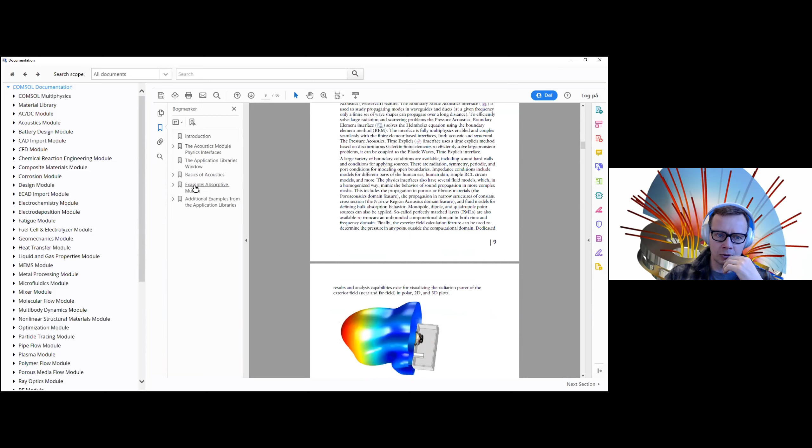An example model. If I click this, some basic acoustics, and again it's good to read. So here you will model a muffler in this case, but it will guide you very, very slowly through all of it. When I go down to the step-by-step instructions, you will be guided very slowly through the whole process of setting up these models.

That way you learn to use the software pretty fast. And then when you have built that model, you go to the application library under the file menu and find whatever model you think is nice. In order to get all the newest models, remember when you open the application library to click the update COMSOL application library button, so you get all the newest models. Then use the PDF for instructions and just open the model if you want to figure out what is going on inside.

That was what I had for now. What we have been going through today is the acoustics module just for licensing purposes, but you can couple it with things from the AC/DC and the structural mechanics module if you're doing loudspeaker microphones, if you have nonlinear structural materials, or if you have composite materials. You can couple it with all these as you need.

For those of you who know a little bit about COMSOL, the uncertainty quantification module is a new module where you can quantify uncertainties. So if you have production uncertainties, you can see how that actually influences your model in a very intelligent way. Yeah, that was all from me, unless you have some questions.

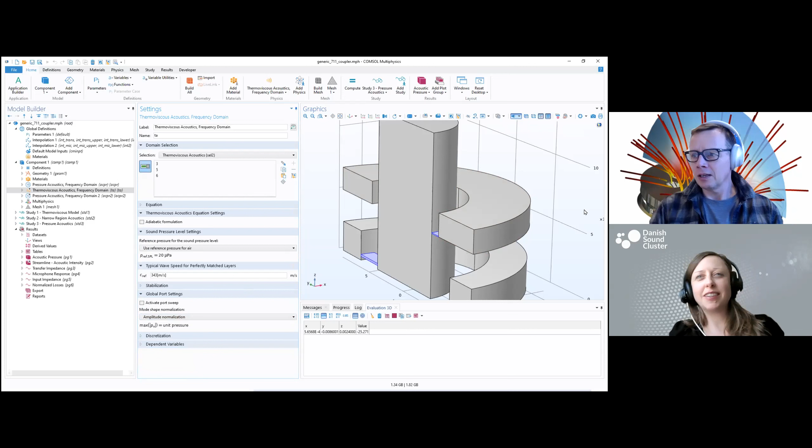Have we lost Mads? Have we lost Mads forever? Yeah, I think he's gone. He got a question that triggered his development mind, so he's looking into it.